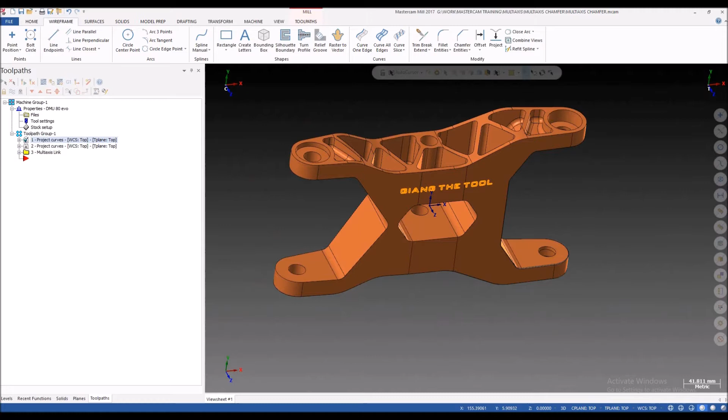Today I'm back with another video on multi-axis toolpath in Mastercam, and we're gonna talk about the 5-axis chamfering toolpath. As you know, Mastercam does not have any toolpath called multi-axis chamfer, so we need to select a suitable toolpath to do the job. We have a lot of toolpaths here, and maybe you still don't know which toolpath we can use for the multi-axis chamfer. So this may be a video tip, not only a tutorial. Okay.

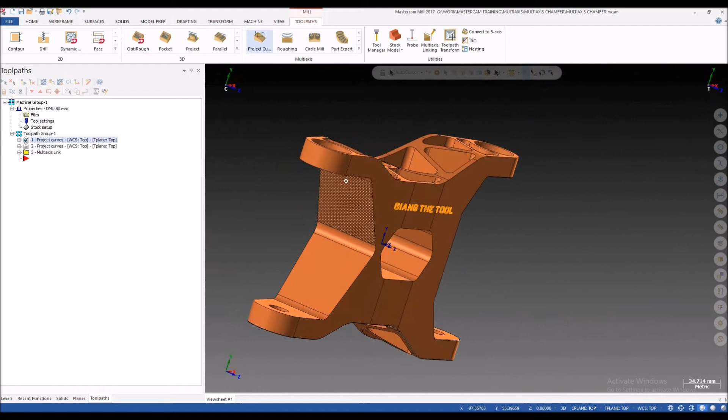After we finish machining the part, there are a lot of sharp edges that need to be chamfered. So for some complicated parts, a 5-axis chamfer toolpath is very necessary and very important. With the 3-axis chamfer, you are unable to chamfer some hidden edges like this. So 5-axis chamfer is a good choice. Alright, and you can see on the screen I have a sample part like this. I will use this part to demonstrate the 5-axis chamfering. Okay.

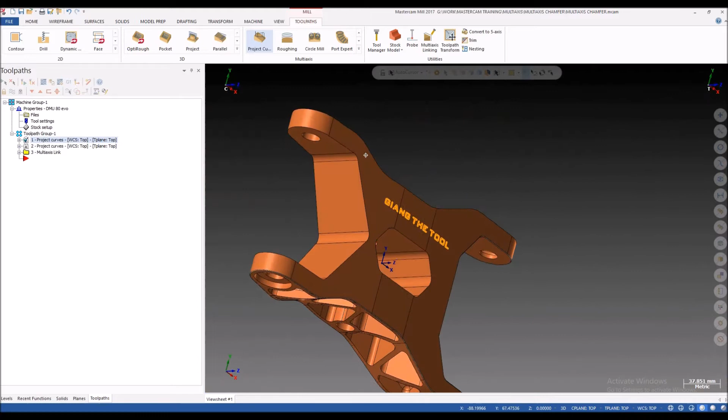You can see this part has a lot of sharp edges, and in this video I'm gonna make some chamfers on some edges, not all the edges on this part because it takes a lot of time, so I just do it for some edges. Okay.

So back to the toolpath, which is the suitable toolpath to make the 5-axis chamfer? I'm not sure I can answer which is the best, but I have tried some toolpaths and I found that there are a few toolpaths that can do the 5-axis chamfer: the curve toolpath and the project curve toolpath. I haven't tried other toolpaths. I think some others may work, but in this video I'm gonna show you how to make the 5-axis chamfer

using the project curve toolpath, because after making some tests with the curve toolpath and the project curve toolpath, I see that the curve toolpath works, but we need to modify the part a lot, and it takes a lot of time and is not so comfortable. So I found another much better way: you can use the project curve toolpath. This is fast, you don't have to modify the parts a lot, so this is much better than the curve toolpath. Okay, so in this video I'm gonna show you how to use the multi-axis project curve toolpath to do the 5-axis chamfer. Okay.

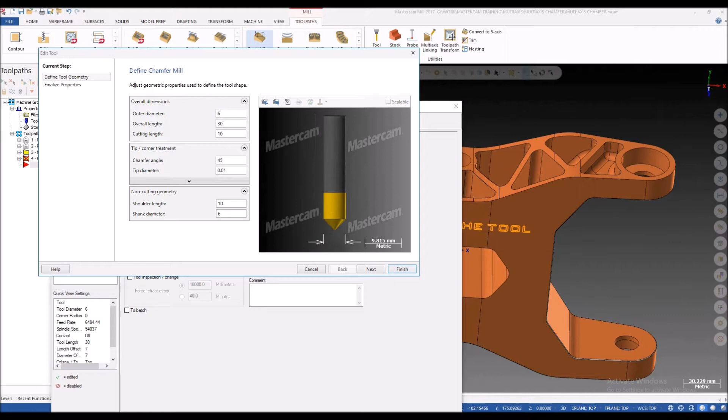For making the 5-axis chamfer, you can select the chamfering tool, or you can select the ball end mill. It's up to you, but in this video I'm gonna select a chamfering tool, a 6mm diameter chamfering tool, to do the cut. Okay, I also have a holder here for the tool.

And in this video I just want to talk about the 5-axis chamfer. This is a project curve toolpath, so there are a lot of other parameters that we don't have to use. So I just want to focus on the important parameters that can help us make the chamfering toolpath, and other not important parameters I will not talk about.

So if you want to make a full understanding, you can click on the help button here and select See Field Definitions, and you can click on the parameter that you want to understand. In fact, I don't have a full understanding of all the parameters here, but I can show you which parameters can help to do the job. Okay.

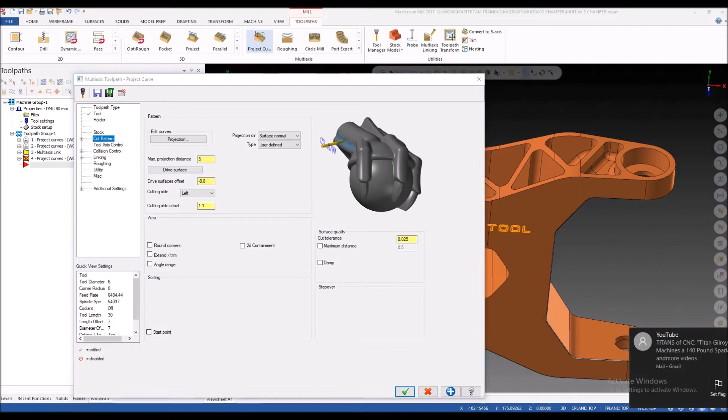So we move to the cut pattern here. You can see on the pattern window we have some important parameters: the edit curve, the projection direction, the type, the maximum projection distance, the drive surface, the drive surface offset, the cutting side and the cutting side offset. Those are some important parameters that you need to remember. Okay, first for the edit curve we have projection here.

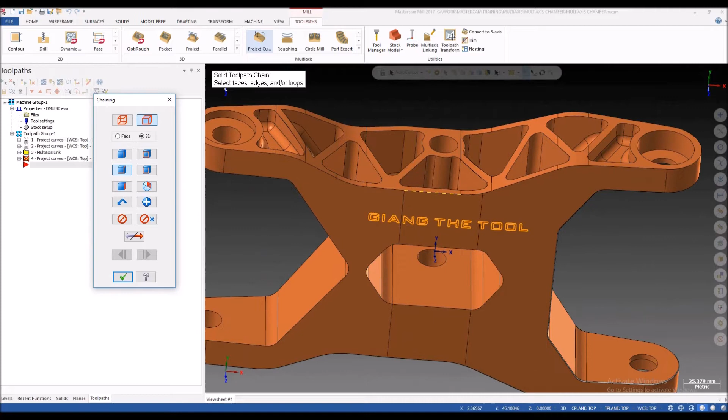We click on this button and select the edges we want to do the chamfering toolpath. You can select the chain in 3D mode, in solid mode, or in wireframe mode. Because on this part I haven't created the curve on the edges, I need to change to solid mode here.

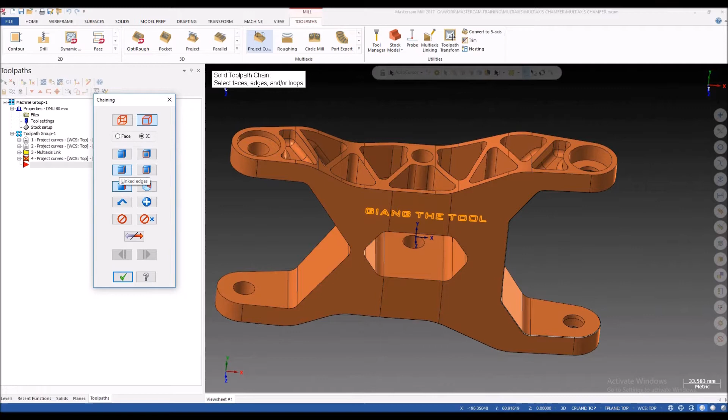In order to select the edges on the solid, I'm gonna select the linked edges to select the edges that don't lay on the same surface. Okay, I'm gonna select the linked edges here.

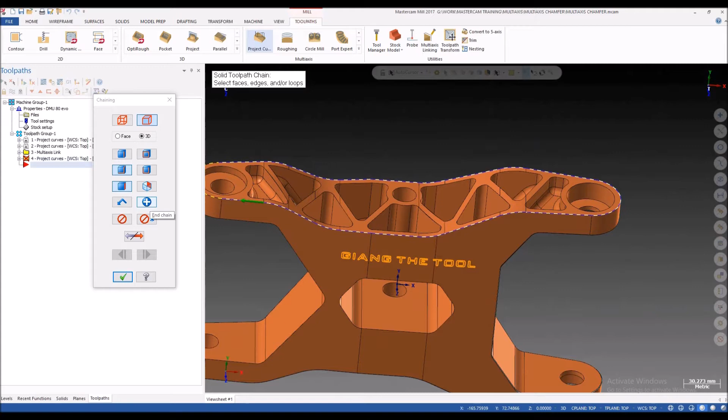It takes a lot of time so I don't want to select all edges of the part, just a few edges to demonstrate how to use the project curve toolpath to make the 5-axis chamfer. I already selected the outer edges of the part, so I'm gonna click on end chain here and select a new chain.

I can select the chain here to do the chamfer on the edge of the pocket. Alright, maybe another one here. Remember to click on the end chain when you finish selecting a chain.

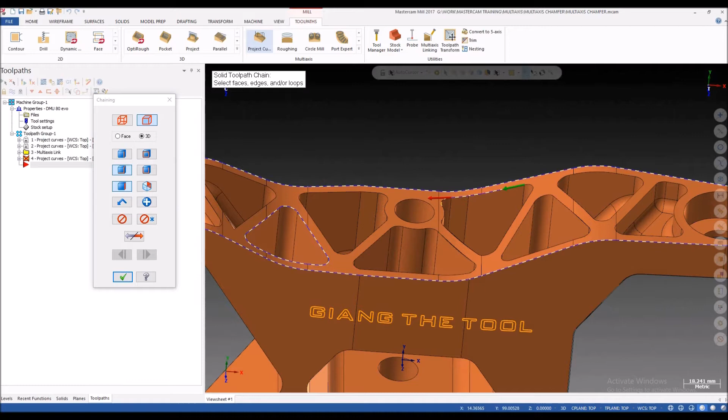Okay, so I have 3 chains for demonstration.

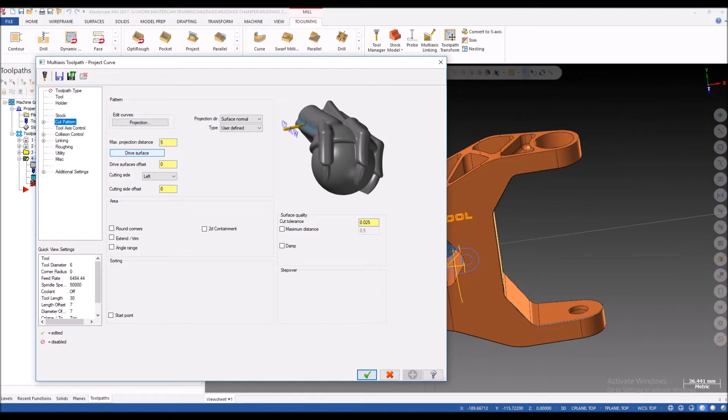After we have selected the curve for the toolpath, the curve we want to make the chamfering on, next we move to another parameter. Either we need to select the drive surface, and you can do it by clicking on the drive surface button here.

Mastercam asks us to select the drive surfaces. So what are the drive surfaces? Those are the surfaces which can control the tool tip.

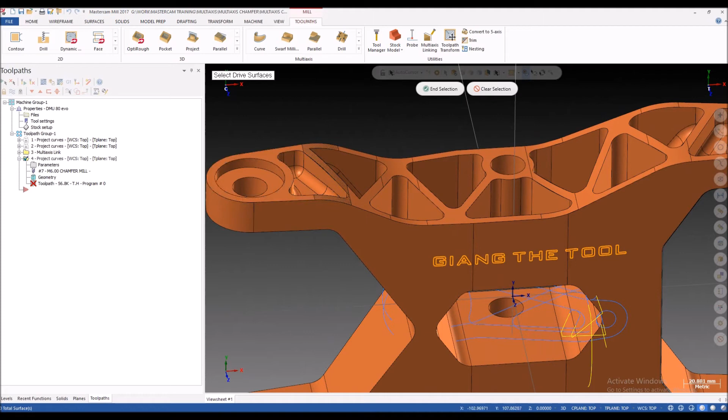In a project curve toolpath, the drive surface is used for controlling the tool tip position, but in this video for 5-axis chamfering we can use the drive surface to control the tool axis direction also. So if you want the tool to stay normal to this surface, this set of surfaces here, you can select these surfaces as the drive surface and also for the tool axis.

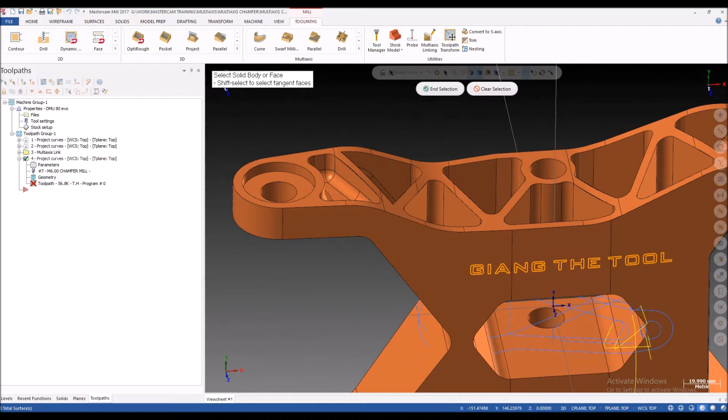Because this is a solid, I should activate the solid selection here. You can press shift and select one surface here, and Mastercam will automatically select the tangent surfaces by clicking and shift-selecting one surface here. Mastercam will automatically select the remaining tangent surfaces.

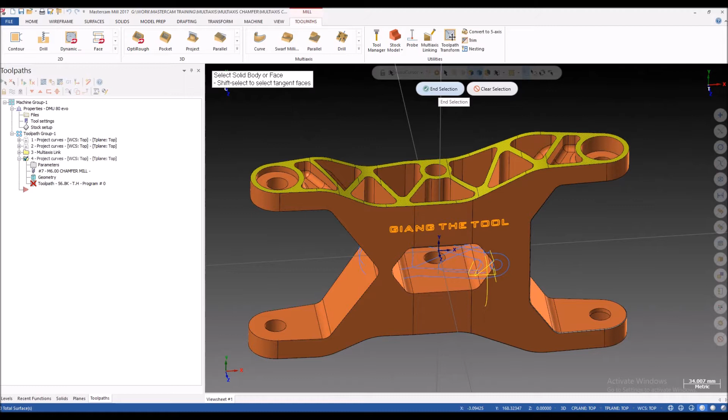So we have selected the three surfaces for the tool tip control and for the tool axis control.

Here we have a parameter called maximum projection distance. That's the maximum distance from the curve to the drive surface which Mastercam can use for the calculation. If you input too small a value, and if the curve and the surface have a distance greater than that value, the projection cannot be done.

So to make sure everything works fine, you can input a large value here, for example 1 millimeter, or 0.1 inches if you're working on an imperial part. I input here 5 millimeters for my projection distance, but in fact you can input maybe 1 millimeter or even smaller. That's enough, no need to be too large.

Next, after we have selected the curve for the chamfer and selected the drive surface, we have to select the projection direction. In this case, for the 5-axis chamfer, you have to select the surface normal. So the curve here will be projected, and the projection direction will be the surface normal.

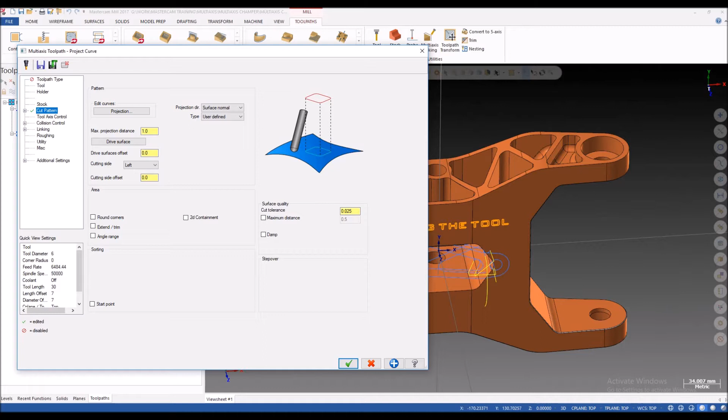And for the type here, you have to select user defined. So Mastercam will do the projection based on the drive surface you have selected.

You also have another parameter called the drive surfaces offset. You can see this demonstration picture: if you input 0, the tool tip will contact the drive surfaces; if you input a negative value, the tool tip will stay below the drive surfaces; and if you input a positive value, the tool tip will stay higher than the drive surfaces. So this is very important.

I will input 0 first, and you can see we also have the cutting side offset. This is similar to radius offset when working on a 2D contour. So I will input 0 and 0. I will modify this later so you can see the differences and understand the meaning of these parameters.

And for the tool axis control, you can select the output format.

If you have a 5-axis machine, you can select 5 axis, and if you have a 4-axis machine, you can select 4 axis. It's up to you. And you can select maximum angle step. You can input a small value for a more precise tool path.

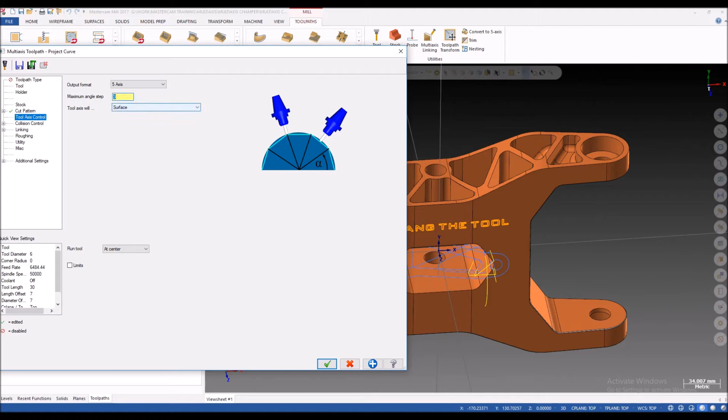For the tool axis direction, I recommend you select the surface. This is the fastest and most effective way to do the 5-axis chamfer. You have many other options, but I think the surface is very effective and the best choice for this situation. So you can use the drive surfaces you selected before to use the tool axis, the tool axis surface. So the tool axis will stay normal to the surfaces you have selected.

One important thing you need to take into account is the collision control here. Normally this collision check on flute will be activated, and if you activate this option, the chamfering toolpath will be impossible to generate. So you have to deactivate this option. You can check the collision on the shaft, the arbor, and the holder, but you cannot check the collision on the flute if you want to make a chamfer, because if you check this, Mastercam cannot make the right toolpath. So you can uncheck this collision checking, or check on the shaft or arbor holder but not the flute.

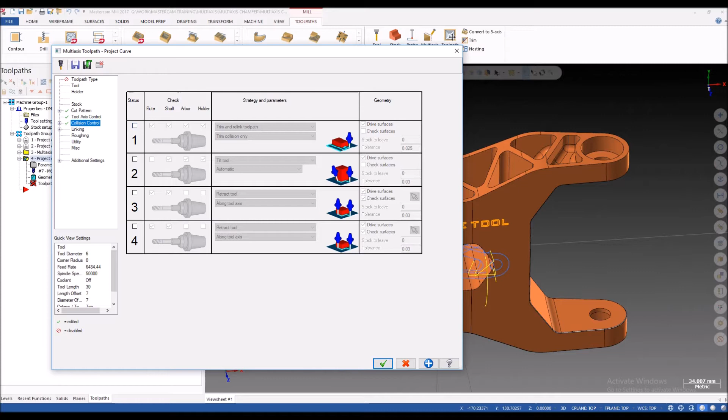And for the linking, you can define the lead in and lead out motion for the toolpath here. You can also select the clearance area. In this case, I select the clearance area as a cylinder, and the axis of the cylinder is the x-axis, and the radius is, for example, 100 millimeters.

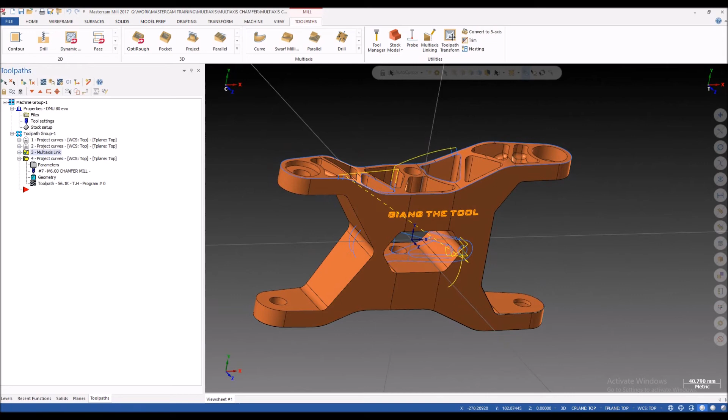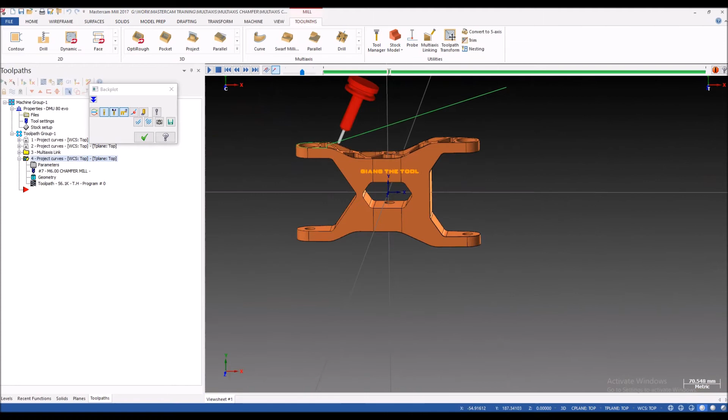You can check, and we generate a toolpath. Right, you can see, this is our toolpath. We have the lead in, and you can see the tool direction stays normal, perpendicular to the drive surface we have selected. So you can see at this position the tool axis will stay perpendicular, or normal, to this surface. So that is the 5-axis chamfer.

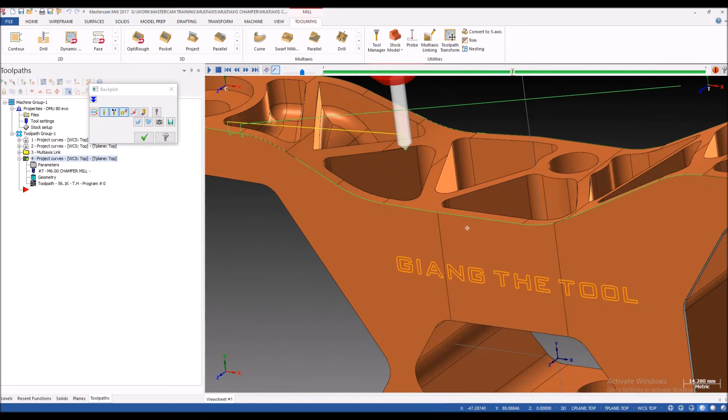Very easy, right? And the tool will retract to the clearance cylinder. So if you want to have a more safety clearance, you can increase the radius of the cylinder here.

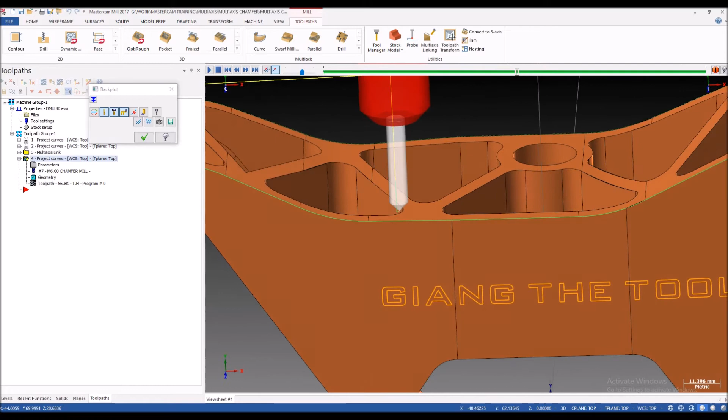This is the clearance cylinder, for example 120. So you can see we have a more safe clearance here. This is the outer edges of the part, and moving to the inside pocket, you can see the tool always stays perpendicular, stays normal to the drive surface.

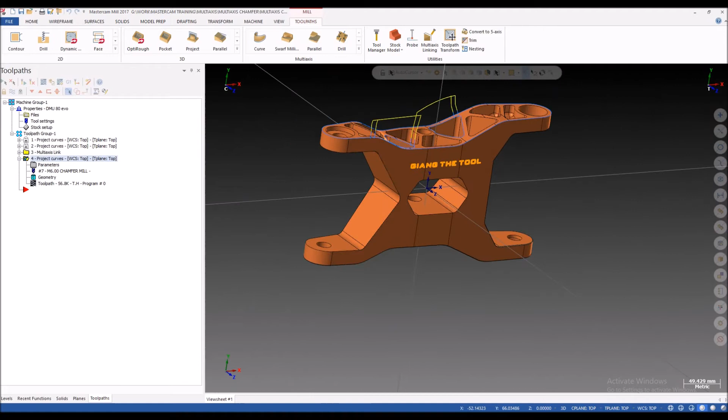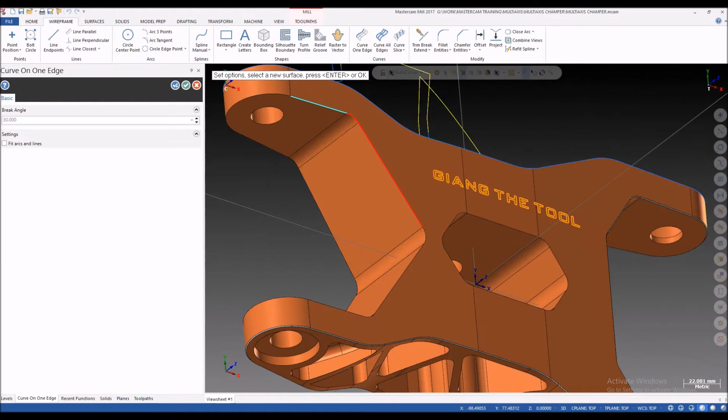So we can do the same for the remaining edge inside here. Next, I'm gonna make another toolpath to do the chamfering on these edges. You can see I will use the wireframe and create curve on edge to make the curve on the edge, so it's easier. You don't need to create this curve, but if you create them, selecting is much faster.

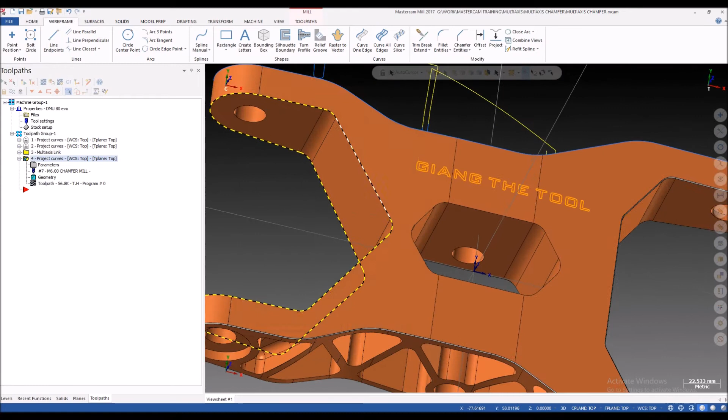So in this toolpath I'm gonna make the chamfer on this edge with a 5-axis chamfer toolpath. You can copy the old toolpath here, or select a new toolpath, no problem. Project curve here, and with the same tool.

For the cut parameter cut pattern, for the curve we select projection, and because we have already created the curve here, we can use the wireframe selection mode and select this chain. Very fast.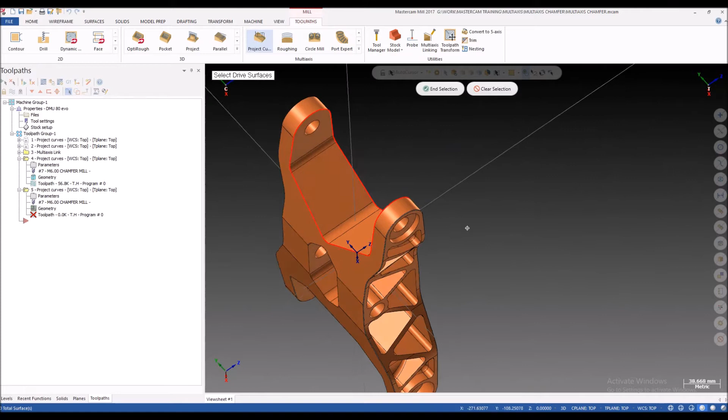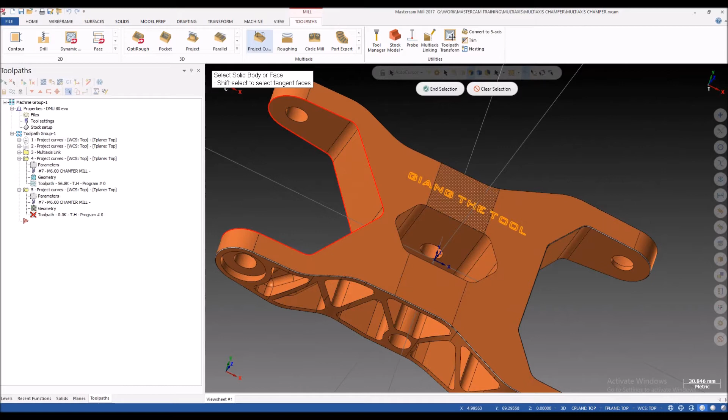And for the drive surface, because I want the tool to stay perpendicular to this surface and this surface, I'm gonna select this surface. Oh sorry, clear selection. If you activate the solid selection here, you should uncheck the body selection. You only check the face selection here, so you can select the surface one by one, not the entire part. I want to select this surface, this surface, this surface, and this surface, end selection. Very simple. Other parameters will keep the same.

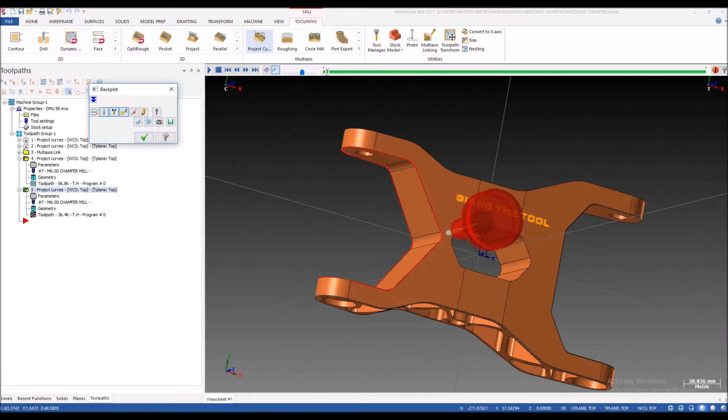And so you can see this is, you can see the tool axis will stay perpendicular to the drive surface at the contact position. Yes, very cool, right? This is the file. Oh, I just forgot to tell you.

This is not chamfering yet, because the tool tip will contact with the curve. So the tip has not made the chamfer, right? Because the tip only contacts with the curve here. So if you want to make a chamfer, we need some trick.

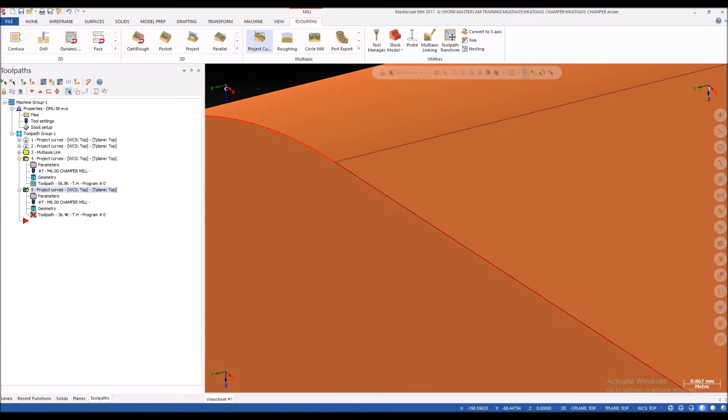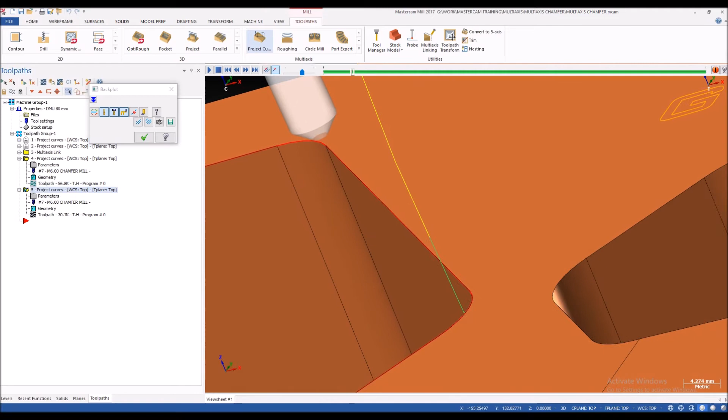In the drive surface offset, for chamfering, you can select a negative value. We want to move the tooltip below the drive surface. For example, I will input -1 millimeter. So what happened here? You can see if I input -1, the tooltip will stay inside of the surface.

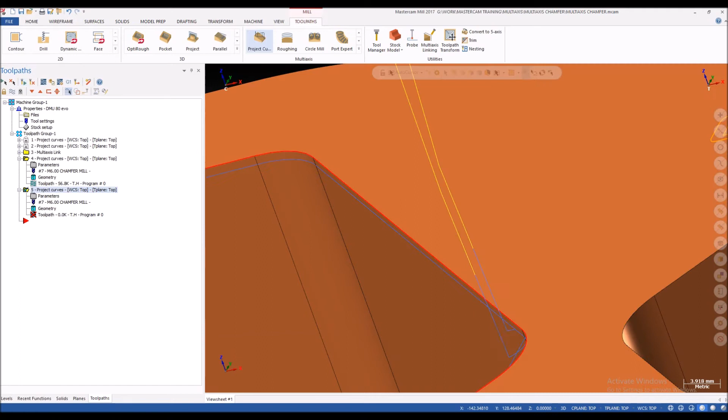So we want to move the tool outside. On the cutting side offset, we can input a positive value, so we move the tool to the left, like this one. It's better to select cutting side. You can select center - oh sorry - left side here. With the center, you cannot input the side offset. So you can select left here.

For example, I will offset 1.2 millimeter to the left, until you get a cool chamfer. So you can see now we have a chamfer, a real chamfer. You can see. So you can input, you want to increase this value.

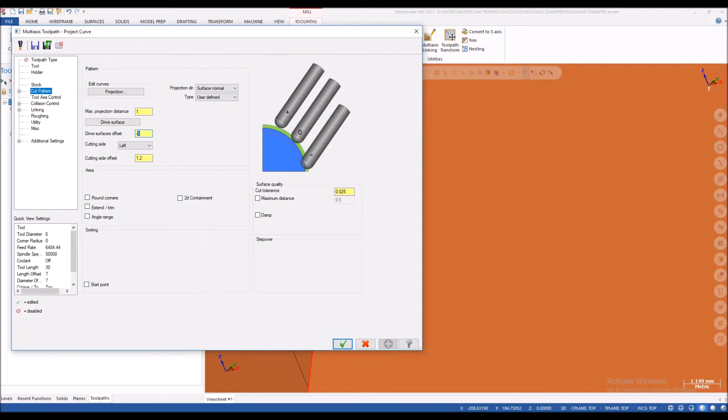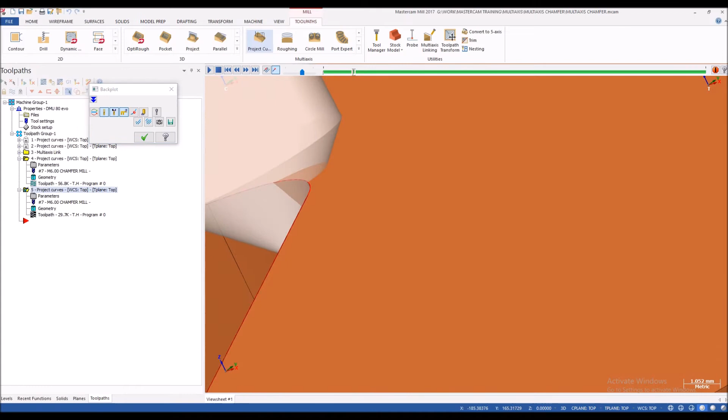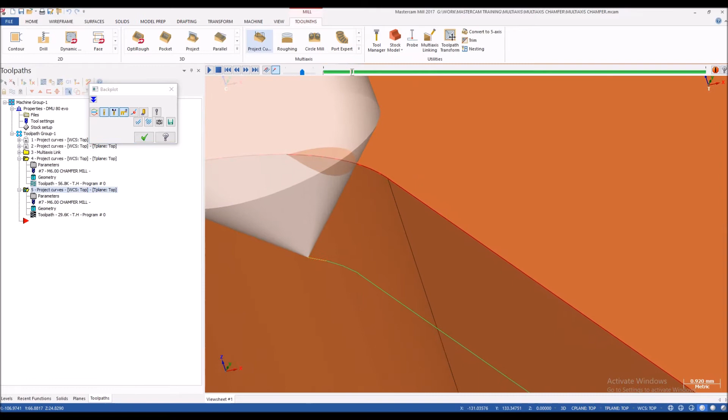This makes a big chamfer. So you need to add more offset to the left. So you can modify the width of the chamfer like this one. If the chamfer is still too big, you can reduce the drive surface offset, or you can increase this one. For example, 3.5. You can modify the value until you get a good result. So this is quite small now, right?

Okay, I'm going to select the stock setup, and we select this solid as the stock, so I can demonstrate how the chamfer works here. Now you can see the tool makes the chamfer, and let's go to the surface here. You can see the tool axis will stay perpendicular to the surface we have selected as the drive surfaces. Very simple, right?

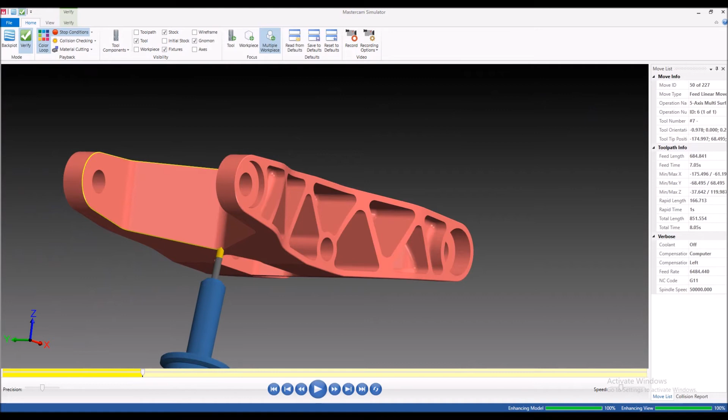And if this chamfer is too small, you can modify the side offset value. For example, you can reduce this to 3 mm, reduce this value and you get a bigger chamfer. Okay, do it again.

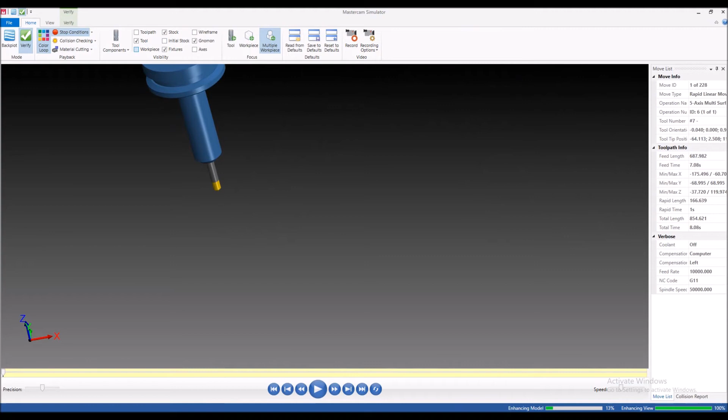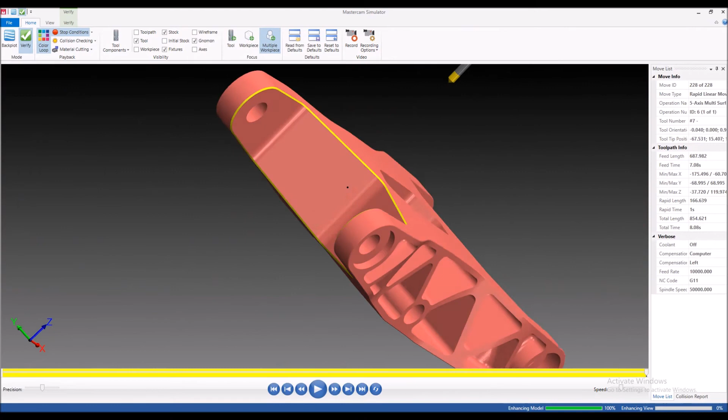Oh, where the stock? Where the stock? Oh my god. Sorry, run it again. Alright, so now you can see I have a bigger chamfer. Very cool, right? Very nice.

And I do the same for the toolpath here. The first toolpath, I forgot to modify the surface offset, the drive surface offset, also the cutting side offset. So you can check if we got a good chamfer here. Yes, alright.

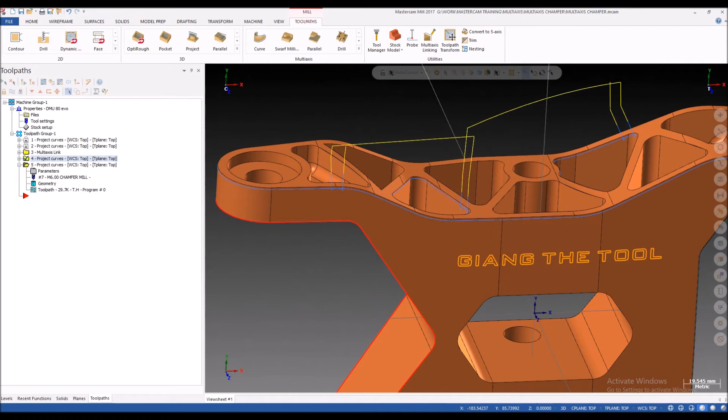And someone will ask why I didn't make the chamfer on this surface and the chamfer on this surface in one operation. That means you want to combine this toolpath and this toolpath in one operation, in one toolpath. Is it possible? Let me check.

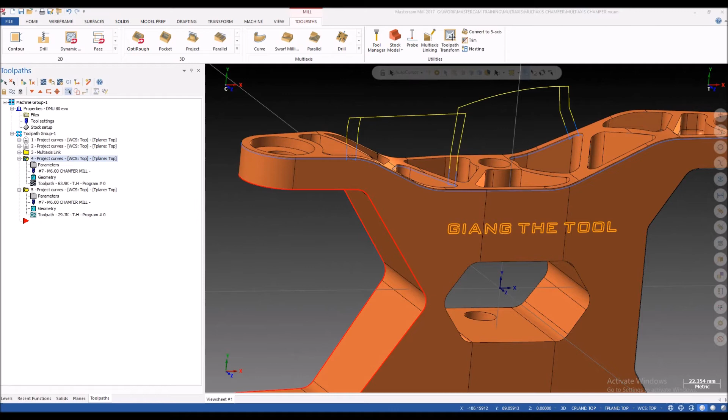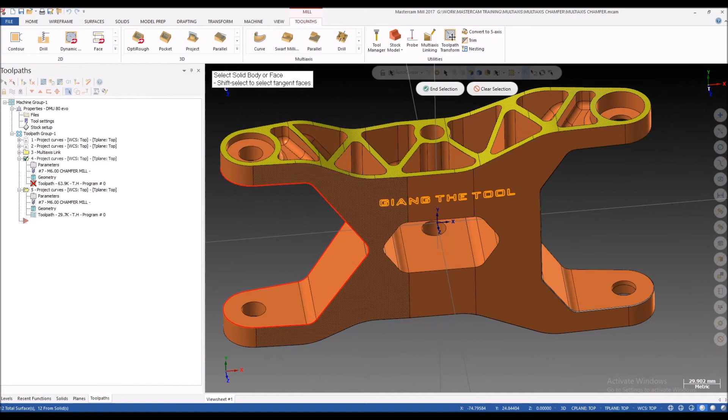Okay, so for the toolpath here and on the curve, I will add more curve, so I will add this one. And for the drive surface, after selecting these surfaces, I select this one, this one, this one, and this one. So let's see what we got if we combine the two operations.

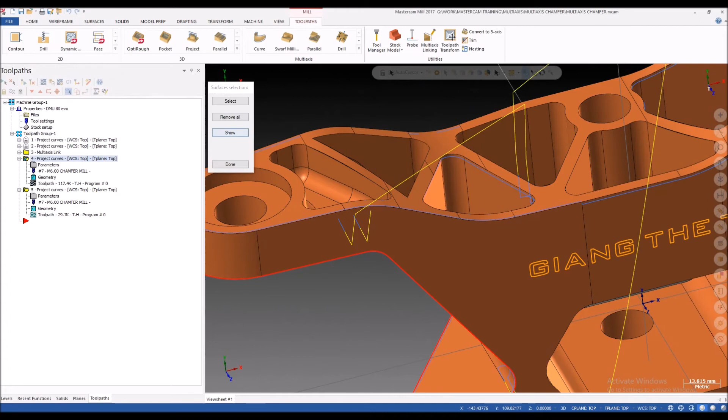So you can see there's a crazy move. You can see that, because you know why? Because for this curve we have two drive surfaces. Let us show you. Because for example this curve here, we have this surface and this surface, so Mastercam doesn't know which is the right drive surface for the tool axis, so the tool will go crazy.

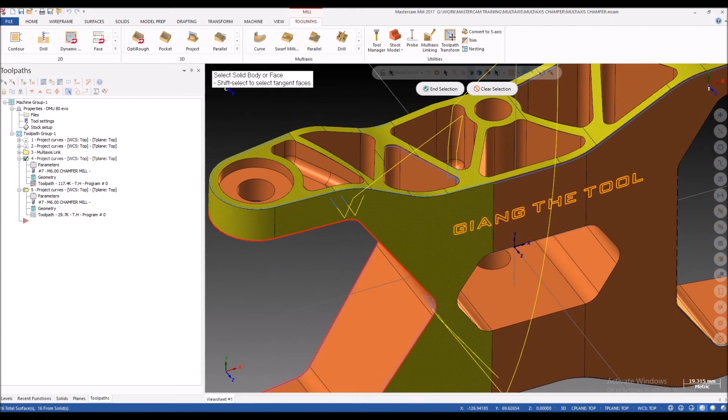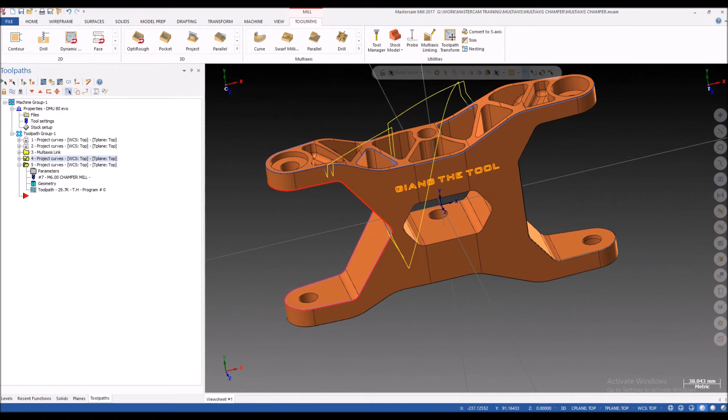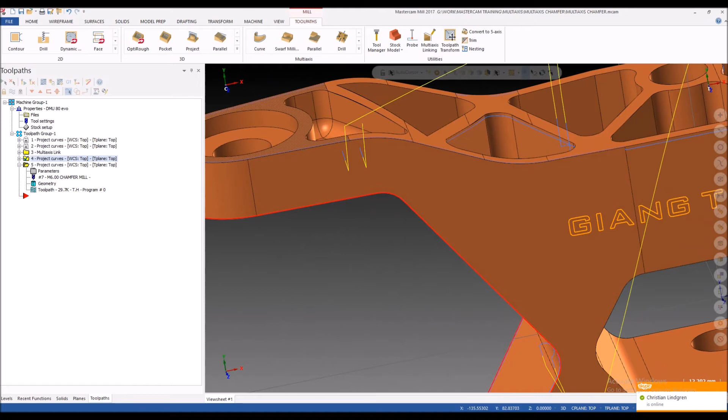That's why I split this curve in one toolpath and this curve here in one toolpath, to make sure there's no drive surface conflict for one curve. So for making the 5-axis chamfer, you need to remember that one curve is only controlled by one surface. If you select this curve and this surface, Mastercam doesn't know which is the right surface to use as the tool axis control. So that's why I split it into operations like this.

This is a solid model without the chamfer already made. But how about if you have a part like this with the chamfer already made on the solid?

It's not much different. I will show you how to do it. We just change the side offset value. So I'm gonna select a new curve.

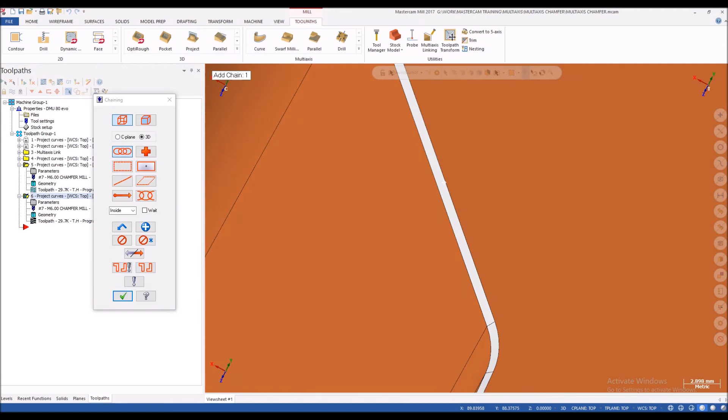For example, this solid had the chamfer already made. It's not similar to before, we have no sharp edges here, you can see we already make the chamfer.

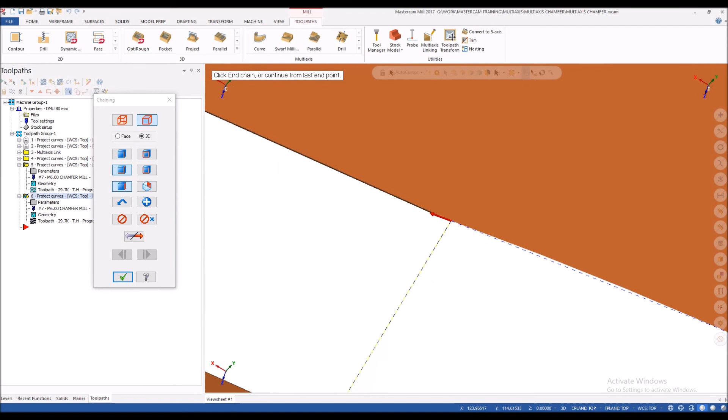I set the edge here. You can see we have a gap because the solid data is not good, so we are unable to make a continuous selection.

To solve the problem, go to the wireframe and click on the chain option. You can increase the chain tolerance here to a larger value, and reselect the chain.

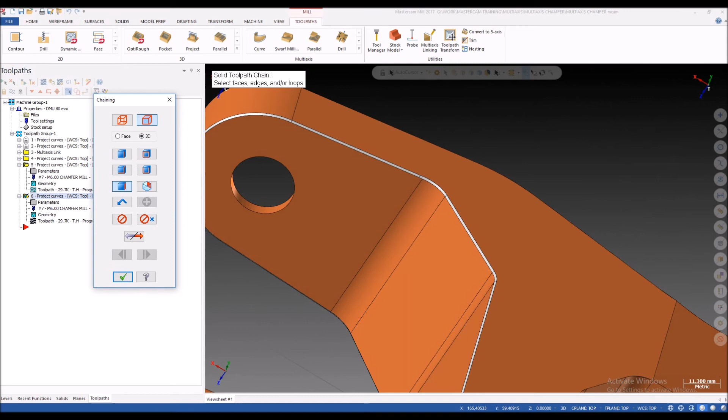That's cool, right? You can see Mastercam will skip the gap because we increased the chain tolerance. That's good.

If you haven't created the curve, you need time to select one by one edge like this. So I recommend that you should create a curve on the edges first before making the toolpath.

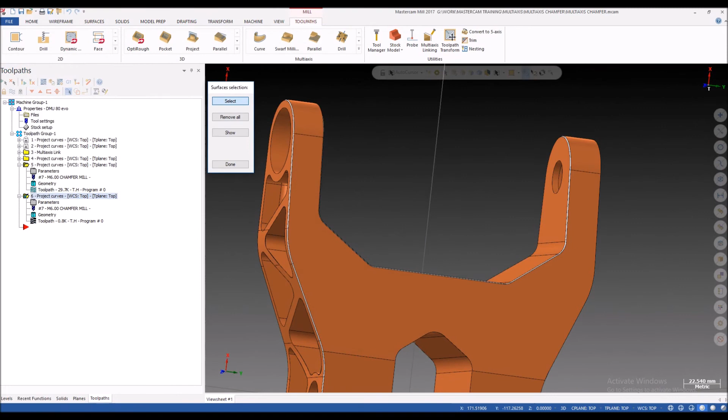Sorry, I forgot to select the drive surface. We don't use the old surface here because of the chain, so we remove the old surface and select the new surface.

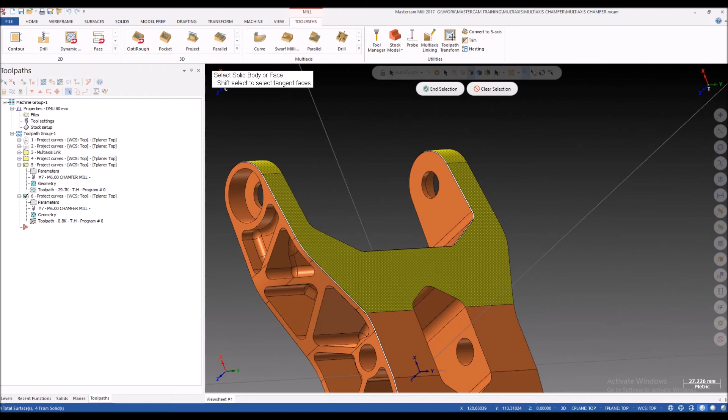If you want the tool to stay perpendicular to a surface, you should select the surface you want. That controls the tool axis.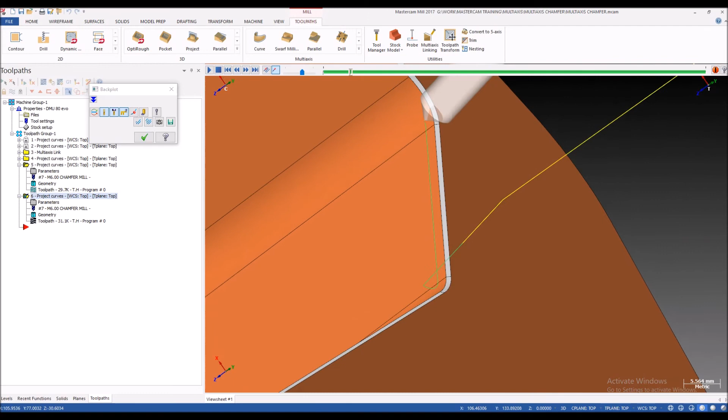You can see we have the same result, but because the chain goes further into the surface, the chamfer will be very big. So you can modify that by increasing this value, the inside offset. We increase it to 4.

So you can see we have a good contact here. So no problem if your solid already has the chamfer, you just change the value of the offset.

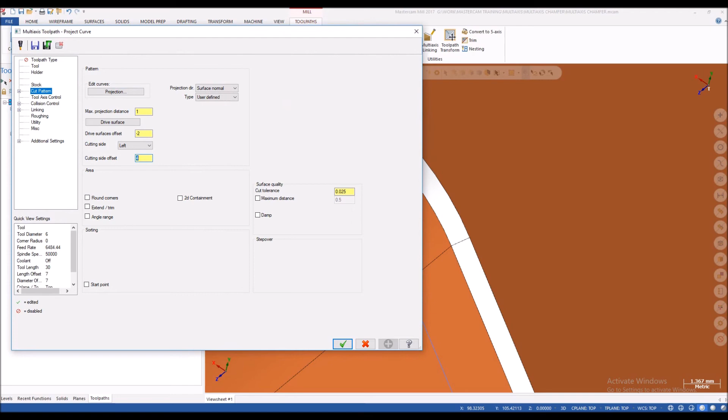You can change the value of the side offset, also the drive surface offset, and you can guide the tool into the right position, and control the width of the chamfer.

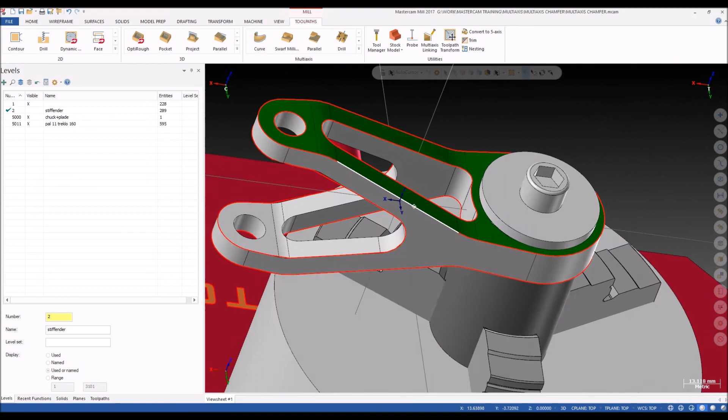And I have another part here, another sample. I can hold the part on the fixture like this, we clamp here, and the fixture is clamped on a chuck like this.

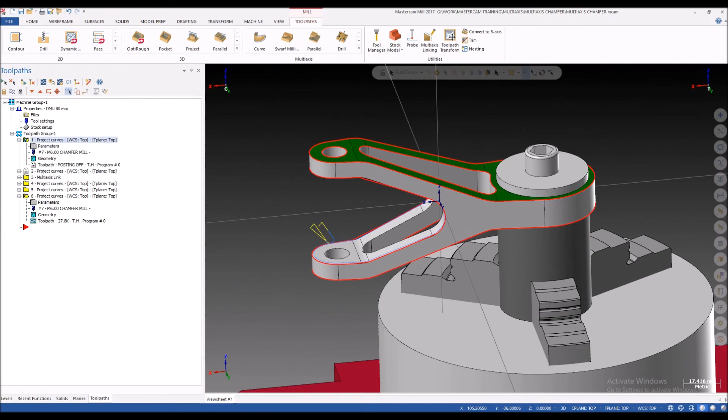You can see I have the project curve toolpath, and I use the same way as the part I made before. So I'm gonna show you the curve and the drive surface I selected.

For the curve, you can see I have one curve here in yellow, and one here on the top.

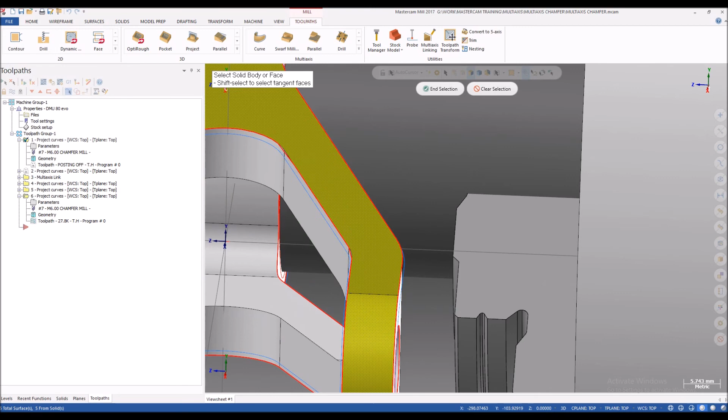And the drive surface, you can see I use one drive surface for this curve and this curve, so the tool will move in the same direction. We can use one drive surface for more than one curve - this curve and this curve use the common drive surface and the same tool control axis.

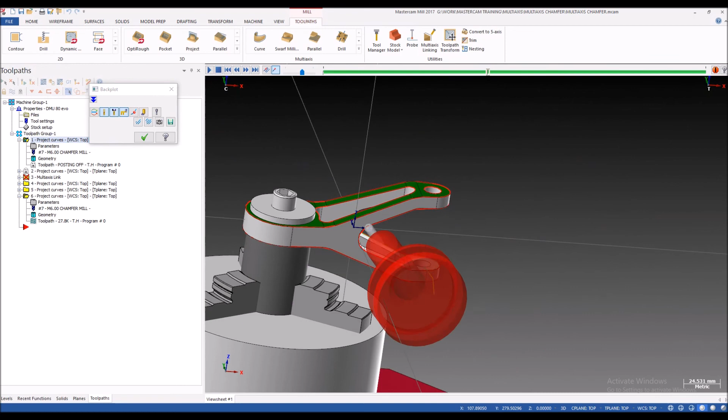So you can see we go this way, the drive surface will control the tool axis. And on this side we go like this one, so the tool will not collide with the fixture.

This is for the bottom of the part, I will use these surfaces to control the tool axis. And for the top face, I will select another tool axis control, so the tool will stay perpendicular to this surface, not aligned with the bottom.

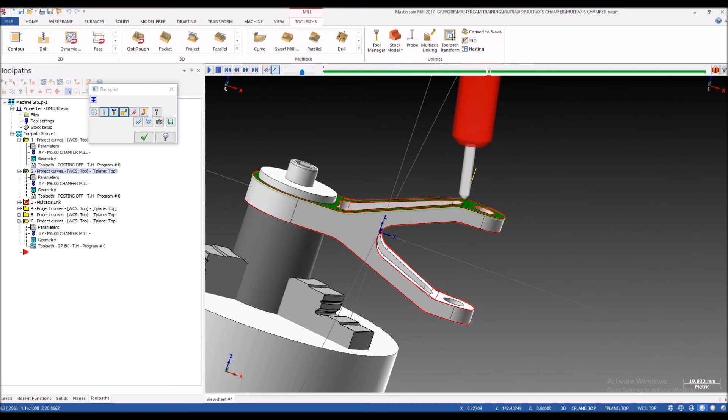Like this one. You can see you have many ways to control the tool axis.

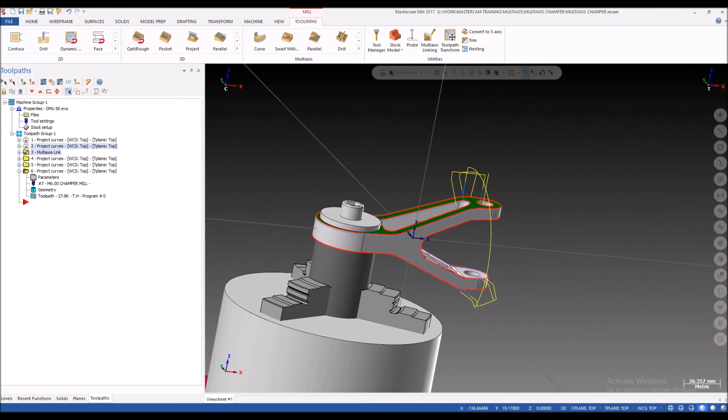So you can also use the multi-axis link toolpath to connect more than one operation. I use the multi-axis link toolpath to connect the number 1 and number 2 toolpath into one toolpath like this.

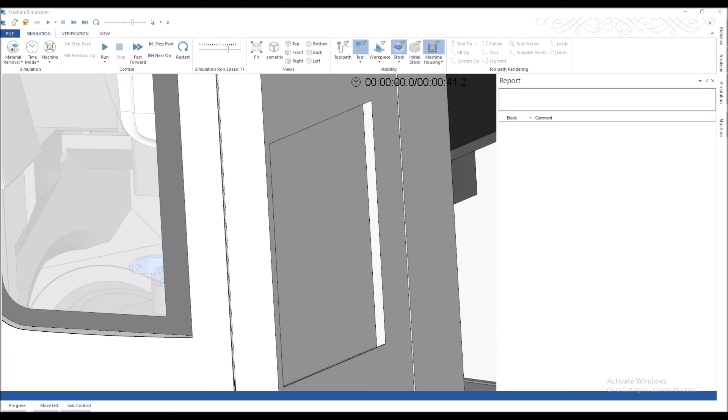Okay, let's see it on the machine simulation. Sorry, I need to reselect the stock.

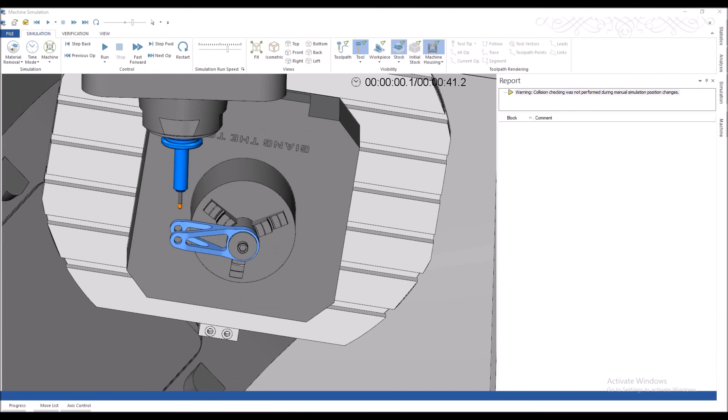Wow, this is a long video. Go to the machine and hide some parts, we can hide the door. Collision start. Okay, go in.

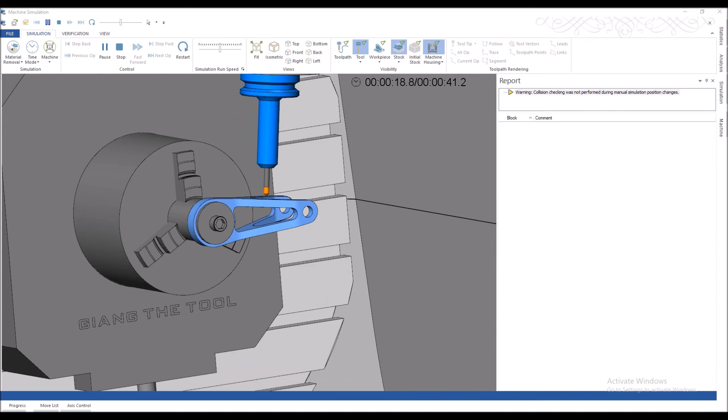So cool, right? Yes, this is the 5-axis chamfer, very simple. With the project curve toolpath, you can do the multi-axis chamfer.